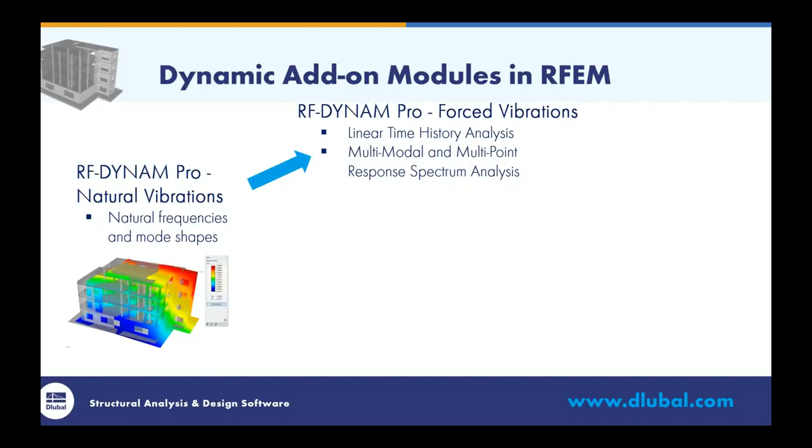Our second add-on module is RF-DYNAM Pro Forced Vibrations. So this allows us to run a linear time history analysis. Now we also have the ability in this module to run a multimodal and multi-point response spectrum analysis. This includes all of the standards such as the ASCE 7 and the NBC standard. The difference here though with this module in comparison to what we'll be using today, it's a little bit more limited. We can't export out the equivalent loads. It doesn't include things like accidental torsion. But it is possible for a little bit of a slimmed down response spectrum analysis.

The third add-on module is actually a module extension to forced vibrations. This is RF-DYNAM Pro Nonlinear Time History. So this just releases a couple of nonlinear solvers for the time history analysis. Now, as far as these two modules here, I previously did a couple of webinars available on our YouTube channel that really explores the depths of these modules. Today we won't be getting into them at all.

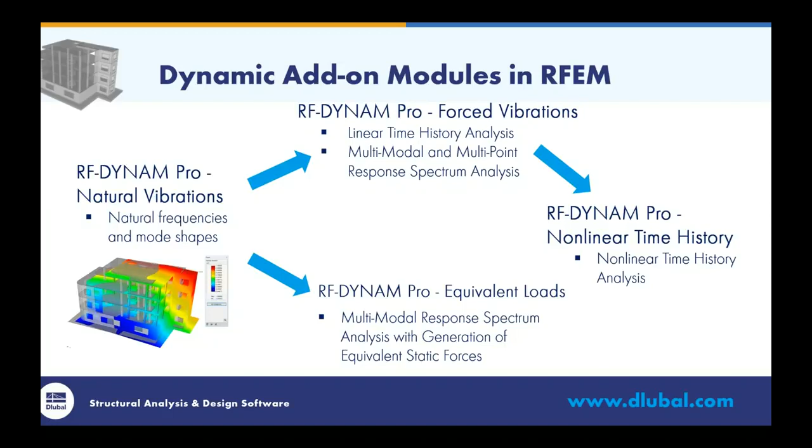Rather, we'll be focusing on RF-DYNAM Pro equivalent load. So this allows us to run a multimodal response spectrum analysis with the generation of equivalent static forces. And again, we'll be focusing on this per the ASCE 7 for today.

So we might be asking ourselves, well, why can't we just run an equivalent lateral force procedure, and how does this differ from a response spectrum analysis? The equivalent lateral force procedure is covered in section 12.8 of the standard, and this really is a simplification of our seismic considerations as a static analysis. So we're applying these point loads and these point moments to our diaphragms. And this is fine for symmetric structures with minimal torsion, no irregularities, no discontinuities. So all in all, it's really for short, symmetric, regular buildings.

And all too often we find ourselves outside of this range. And instead of running this simplified method, this is where we would turn to a modal response spectrum analysis. And this is covered in section 12.9 of the standard. So this takes into seismic considerations as a true dynamic analysis. We run our modal analysis to determine the mode shapes and modal mass participations for different frequencies of our structure.

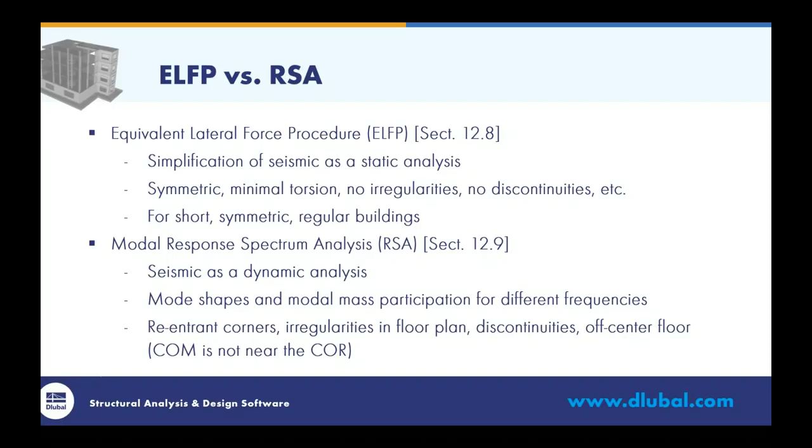This can be considered with buildings with reentrant corners, irregularities in floor plans, discontinuities, maybe off-center floors where our center of mass is not near the center of rigidity. Essentially this can be used for any type of structure, so perhaps you don't even have a building at all, but some type of specialty structure. With a response spectrum analysis, you can consider seismic with all different types of geometry.

With that said, we will jump into our first example today within RFEM. For the sake of time, I went ahead and modeled our concrete structure here in our main program, RFEM. We can see over on the left-hand side is our project navigator.

Because our model is already available to us here, we can view all of our input data on the left-hand side. For example, I can view all of my materials - in this particular case we're just using concrete 4000 PSI. All of my surfaces are available here for the different walls and slab elements. We also have some columns and beams modeled in, and we can view those available cross sections here.

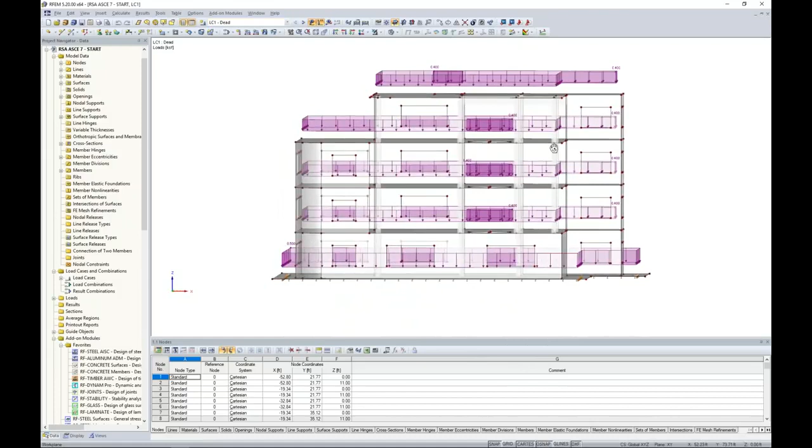RFEM also allows me to load the structure. Within my drop-down box at the top, I have a few different load cases. I have a dead load, which is just simple surface loads applied at each level, same concept for the live load - we can see those applied to the structure here. Finally, I have a third load case, which is snow load applied only to the roof.

If I was interested in running a full static analysis with these loads, I would do so within RFEM. But instead, we want to immediately move to a dynamic analysis, and this is where we want to utilize our add-on module.

On the left-hand side you can see in the project navigator our long list of add-on modules. This is why we have the concept of just pay for what you use. For example, if you don't particularly run a lot of dynamic analysis for your projects, you would never purchase the dynamic modules. So it just keeps the software catered for your individual design needs.

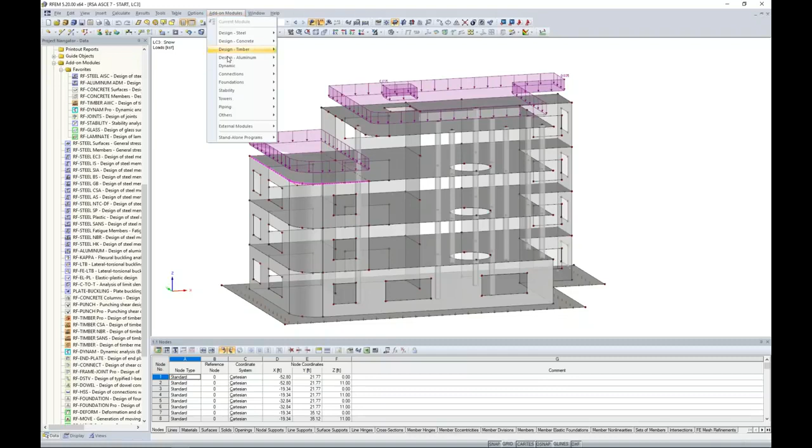We can access RF-DYNAM Pro either here or within our drop-down box at the top under add-on modules. You can see the dynamic option in RF-DYNAM Pro. An add-on module within RFEM is nothing more than a simple dialog box, and here we have all four of the dynamic modules that I mentioned within the PowerPoint.

You'll notice that natural vibrations is immediately checked because, as I mentioned, this is a prerequisite to the rest of our dynamic modules. We also can activate the mass combinations, which brings up a new tab at the top. All we need to do is simply work from left to right with these tabs.

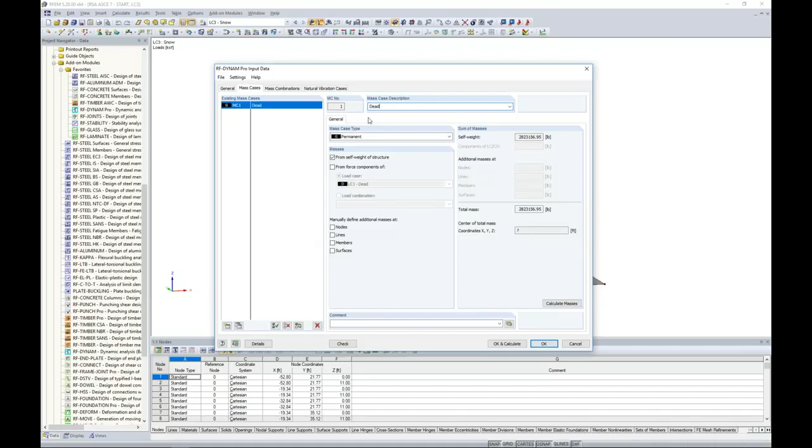So we move into the mass cases. Our first mass case is going to be dead. What we can do is directly import the loads from RFEM, so all those surface loads I had applied at every level, I can import in from the load case dead. Now I do want to uncheck self-weight of structure - I've already accounted for it in my load case back in RFEM, so if I leave this checked on, I'm accounting for it twice.

We can manually define additional masses, and I'll actually do this a little bit later on, but for right now we'll leave this empty. So we can make a copy of this mass case and rename this to live, and import the live load case from RFEM. And we make a third copy here, rename this one snow, and import the load case snow.

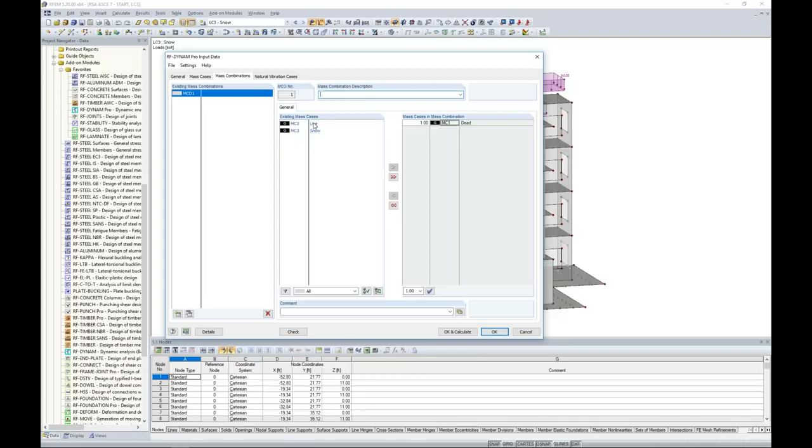Once we have completed our different mass cases here, moving on to mass combinations, we need to combine these together. Referring to the code, section 12.7.2, the standard tells us that we need to include 100% of the dead load. As far as the live load, if the live load is being used for storage, then we'd want to include 25% of the live load as well. Now for my particular case, let's say this is some type of office building, and we're really not using this live load for storage, so I can leave this mass case over here on the left to not use it.

For snow load, we want to include 20% of snow load when our magnitude is greater than 30 psf, and in our case we have 35 psf. So what we can do is simply change the factor out front to 0.2 to account for 20%. We can give this mass case a name if we'd like.

We'll call this one dead plus 0.2 snow. Finally, we have our natural vibration case tab. The lowest eigenvalues to calculate here is by default set to 4. That's a fairly low number, but for our first calculation today, let's just go ahead with 4.

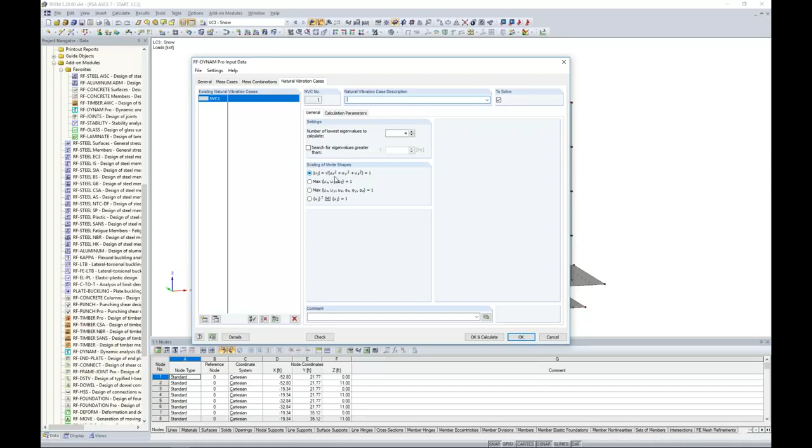The scaling of the mode shapes has a few different options. The default is to take the square root sum of the squares. There are other options, which I'd encourage you to access in the help manual in the lower left-hand corner for the dynamic modules, giving more theory on these scaling and mode shapes to determine if they'd be better for your design project.

The calculation parameters - we want to choose the mass combination we just created. As far as the acting masses, this is controlled by the type of mass matrix. By default, the diagonal matrix with only translational degrees of freedom is selected, so our masses only act in the global X, Y, and Z, which we can see back in RFEM.

The second option, diagonal matrix, will include both translational and torsional degrees of freedom, so now we're including masses about those axes. There are several different options here, but we'll just go with the first default.

Similar to what we just mentioned with the type of mass matrix, as well as the method for solving the eigenvalue problem, for the different calculation types you want to refer to the help manual for more insight on the theory behind each one.

For today, we'll utilize the Lanczos solver, which is an iterative method to determine the lowest eigenvalues and corresponding mode shapes of large models. This allows us quick convergence and runs a bit quicker than, say, the root of the characteristic polynomial, which determines all eigenvalues and corresponding mode shapes.

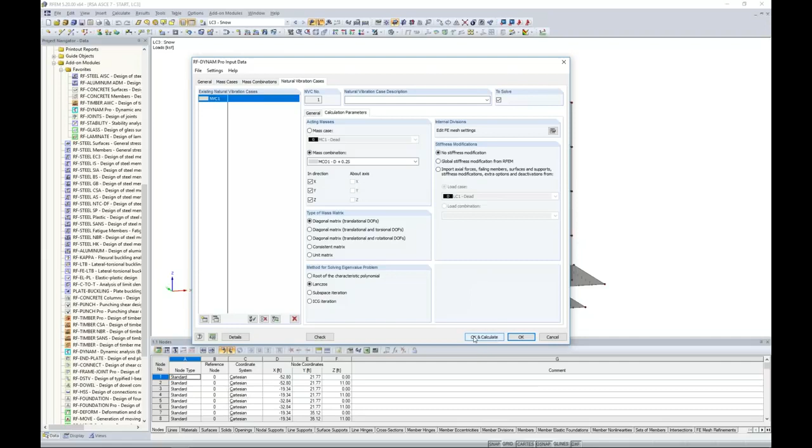As far as stiffness modifications, we're going to leave this as no stiffness modifications for now, but keep this in mind because we're going to visit this later when we discuss P-delta. So all I need to do is click OK and calculate.

The program's meshing it in the background in RFEM. We're running through our 4 different eigenvalues and we're immediately thrown back into RFEM. Now I'm technically still within this add-on module RF-DYNAM Pro. We can now see this within our drop-down box here.

I think the most relevant information for these results relates to Table 5, dynamic analysis, and we can jump to the effective modal mass factors. Here I can cycle through my 4 different mode shapes to view what they look like on my structure. But most importantly, we want to look at the last row in this table, because this gives us our mass participation.

You'll see in the X we have 81.6% mass participation, in the Y 76%, and in the Z only 2%. This is actually a problem because section 12.9.1.1 in the standard tells us we have to have a minimum of 90% mass participation of the actual mass in each orthogonal horizontal direction. So in my X and Y directions, I'm not meeting that 90%.

As far as the Z direction, today I'm really going to focus on excitations in only the lateral directions, but if vertical seismic is also something you're concerned with, then you probably want to make sure you have adequate mass participation in the vertical direction as well.

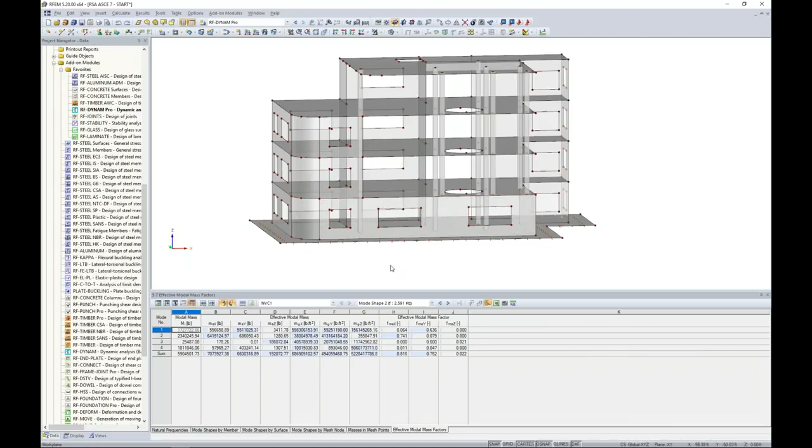So how exactly can we do this? Well, under the Views tab, and remember I'm back in RFEM here, I'm just going to activate my surfaces by material. So all that I've done here is I've just deactivated my columns and my beams, so only my surfaces are available with this graphic view.

So I can select all of my wall elements on the first level, and I can create a visibility by the selected objects. So after all these elements are highlighted, I can right click and I can choose this option, Center of Gravity and Info. What this is going to do is tell me the total weight of all of my elements selected here, which is 261,000 pounds.

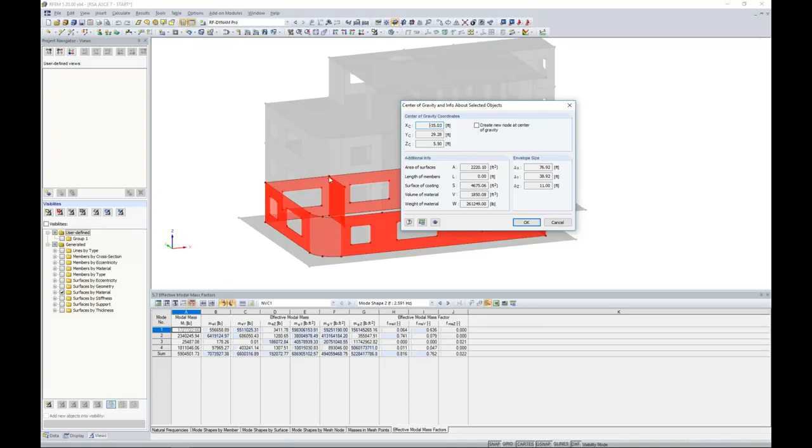So somehow we want to redistribute this total weight here at the top of our walls instead as a line mass. So what we can do is jump back into RF-DYNAM Pro, which we can access within our project navigator over on the left. What I'm going to do is go to the mass cases, and I'm going to create a copy of my dead load mass case.

And I'm going to rename it here to deactivate. And under the details option, this is where I have the ability to neglect masses, and I go into my special details. I have 4 different tabs at the top, including surfaces.

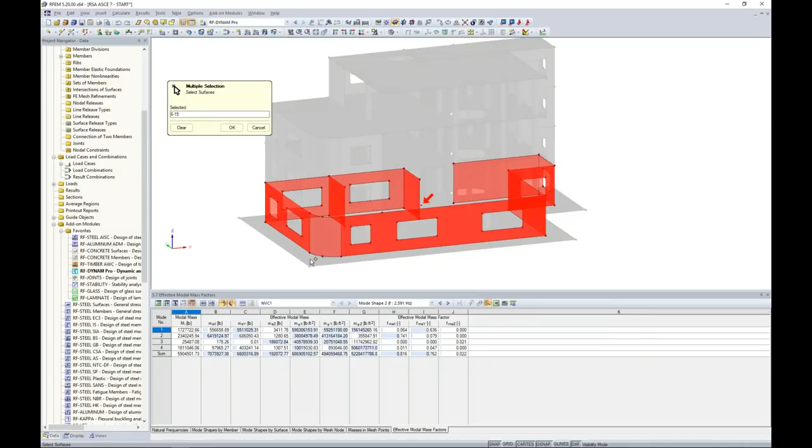So I can graphically select all of these wall elements that I have this visibility turned to back in RFEM, which includes 6 through 15 for my surfaces. Now I also, remember, want to select this slab at the bottom. So I could change around my viewports, but rather I can just simply type in surface number 1 in addition to this, and now you can see that bottom surface is highlighted as well.

And we want to neglect these masses in the X, Y, and Z directions. So I click OK, and I'm brought back into my Mass Cases tab here.

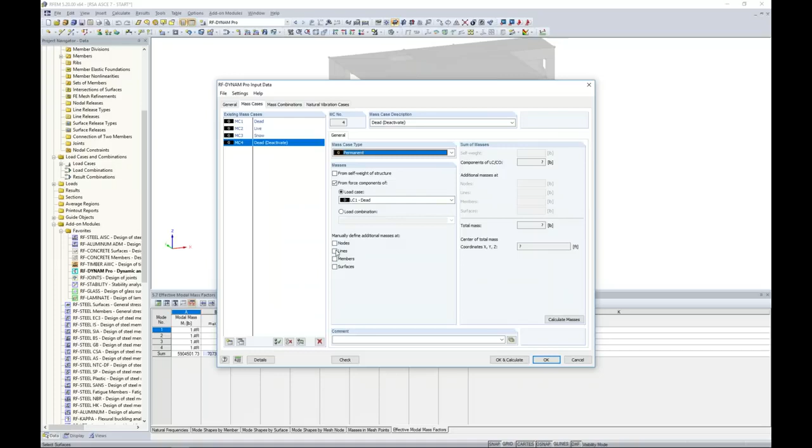This is where we want to manually define additional masses on lines. I have a new tab up at the top. So all I need to do here is I can graphically select every line at the top of these wall elements, and I will exclude these interior walls though. So I have every line element selected on the exterior.

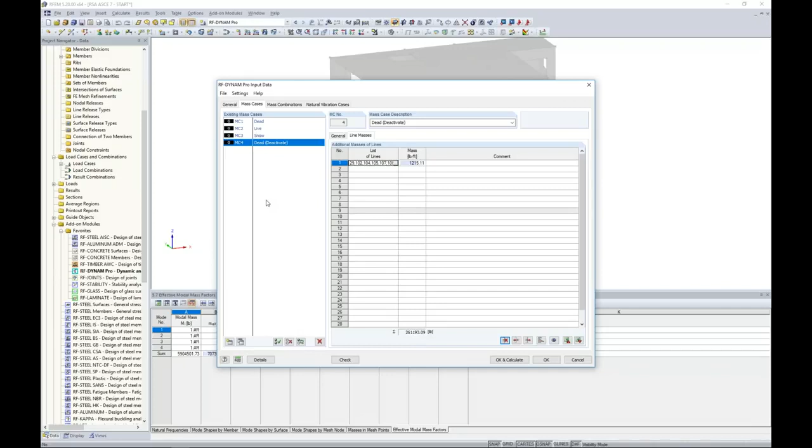Now I know the total length of the exterior of my building here around these walls is 215 feet. So I click OK, and what I can do is take that 261,000 pounds divided by the 215 feet to get a line mass of 1,215.11 pounds per foot. So now you can see the 261,000 pounds is represented in the sum here. So we're just redistributing that mass a little bit further away from the support to hopefully get more mass participation.

As far as the mass combinations, we want to create a copy of our previous mass combination, and we're going to rename this one. All we're going to do is swap out that dead load mass case. I'm going to instead bring over this dead load with the deactivate, 100% plus 20% of my snow.

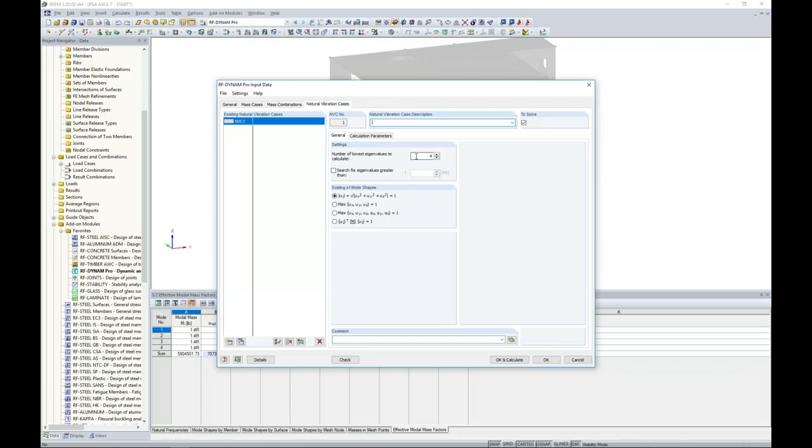So now for my natural vibration case, let's maybe solve as well for some additional eigenvalues. And by the way, as I mentioned, this is probably the first step that you want to take before you're redistributing masses. I just want to show both options in one step here with our example today. So we'll solve for 10 eigenvalues this time.

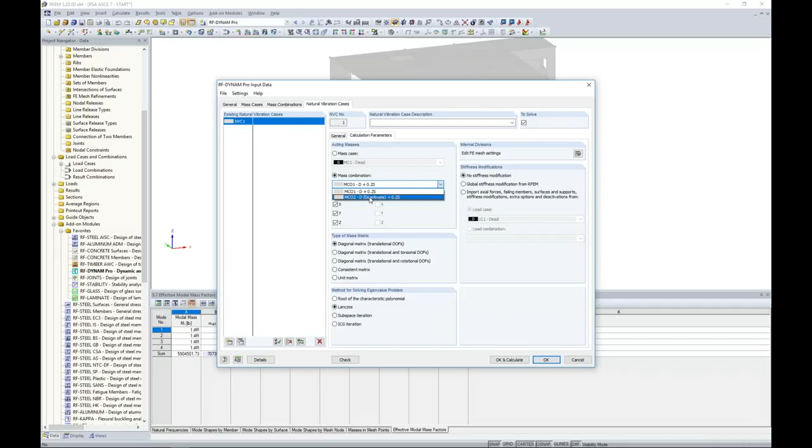Under the calculation parameters, we do need to choose our second mass combination here. So now we can click OK and calculate. So the program meshes the RFEM model in the background. It'll take just a split second longer because now we're going to calculate a few more mode shapes for a total of 10. So once the program's done, it brings us back into RFEM here.

We can cancel out our visibility mode, and now we have the 10 different mode shapes available to us here within our dropdown, so we can view exactly what those look like graphically. Now, of course, what's most interesting is the effective modal mass factor table here. And at the very bottom, I can now see that I have 91% in the X direction for the mass participation, 93% in the Y direction, and 41% in the Z.

So you can see what a significant difference those changes made with our total mass participation, and now we're meeting the 90% required by the standard.

We might be interested in viewing what our dominant modes are. We can take a look at mode shape number 1 here, and we see that this is our dominant mode in the Y direction, where most of the mass from the structure is contributing to this mode shape.

We can take a look at mode shape number 2. This would be our dominant mode in the X direction.

Now this is in comparison to mode shape 3, where we really have no mass participation, and this is called a local mode. We just have something happening up here at the top of the structure, so you can see mass participation in the X and the Y is 0. This mode shape really is not of much interest to us.

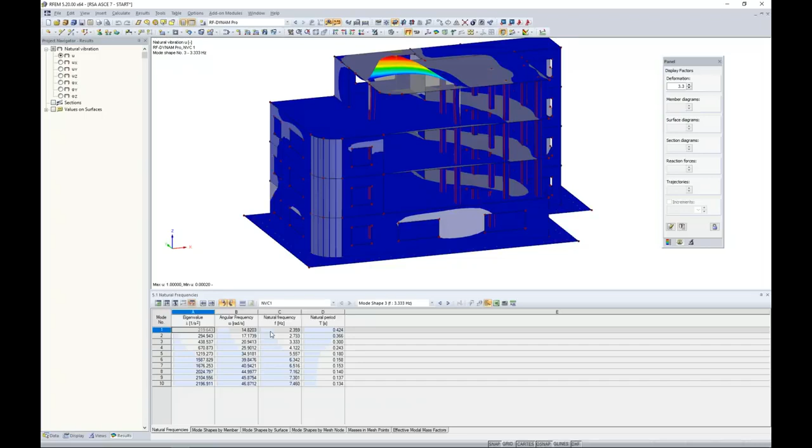Under the natural frequencies tab, this is where we can view the angular frequency, the natural frequency, and the natural period of our structure for these different modes.

So now that we have determined the natural behavior of our structure under the applied mass cases and mass combinations, we want to move into a response spectrum analysis.

Under the data tab, we're going to go back into RF-DYNAM Pro. This is where we're going to activate the response spectrum analysis with the generation of equivalent loads, using our second dynamic add-on module, RF-DYNAM Pro Equivalent Loads.

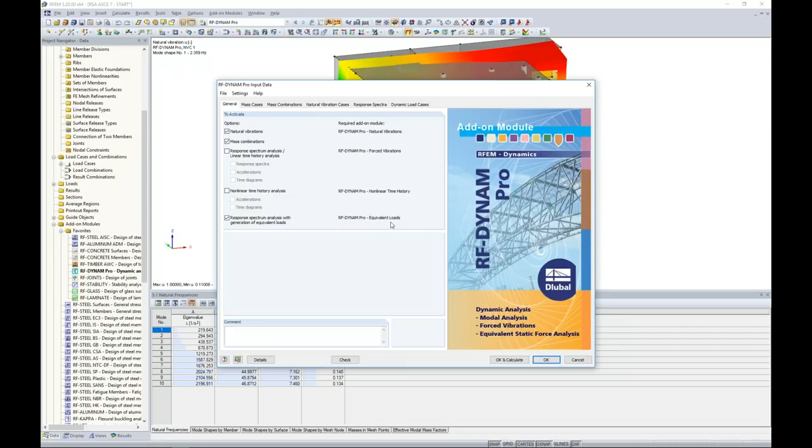Now, everything remains the same for my natural vibration case. I didn't lose any of this data, it's still available to me. All that I've done is added a couple tabs here for my response spectrum analysis.

What we want to do first is select our drop-down box here, and you can see ASCE 7-2016. We also have available NBC 2015, as well as many other international standards.

Moving forward with ASCE 7, over on the left we have some available data that we need to input into the program in order to correctly generate the response spectra for our project today. The first would be the site class, and with this particular concrete building, we've determined that we have site class C.

We also need to input the mapped spectral response acceleration for short periods, S-sub-S, as well as for a period of 1 second. We can refer back to ASCE 7 for this information, but instead I actually want to refer you guys to our website.

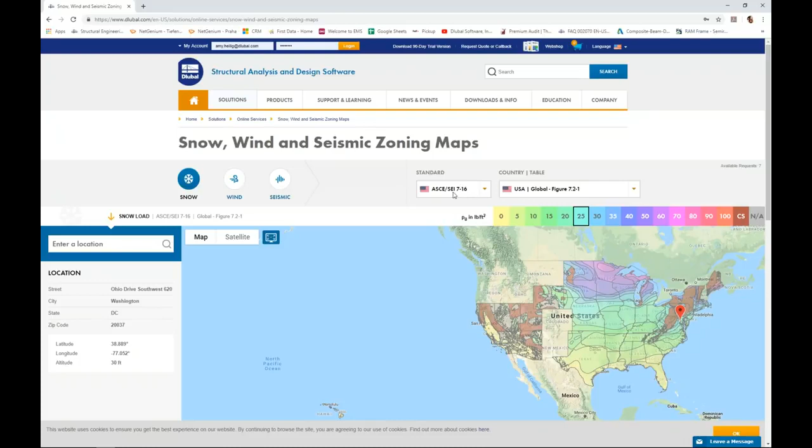So if you go to our website at dlubal.com, under Solutions, we have the option for snow, wind, and seismic zoning maps. What we've done is integrated Google Maps technology along with the ASCE 7 maps and tables for snow, wind, and seismic loads.

How this is extremely beneficial is that all we need to do is type in the location of our project. So for example, maybe this project today is located in Denver, Colorado. So we type in Denver, Colorado, and the map populates.

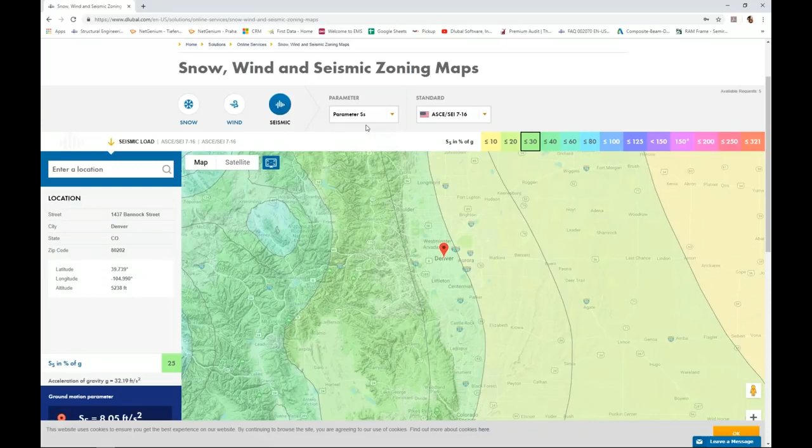We can hold down our control key to zoom in here, and we want to select seismic from our options up at the top. Now with the seismic and this parameter drop-down box, we can choose S-sub-S. This is the information directly from the ASCE 7 standard, and the S-sub-S is 25% of G.

Same thing with S-sub-1 that we'll eventually need. Once this is populated, when we choose it from our drop-down box, we get 6% of G shown over here on the left-hand side.

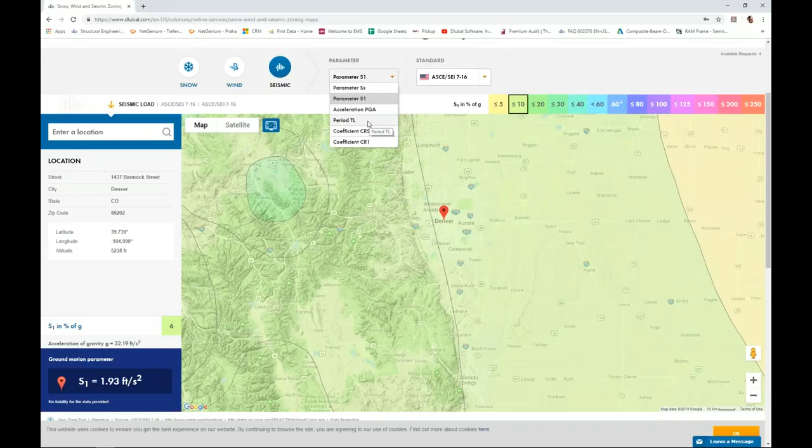A few more parameters are available. The other important one will be the long period, which if we select this one, we can see that the long period is 4 seconds.

So it's extremely beneficial if we just don't want to manually flip through those maps within the code. The ability to go on our website and check this out for yourself is available.

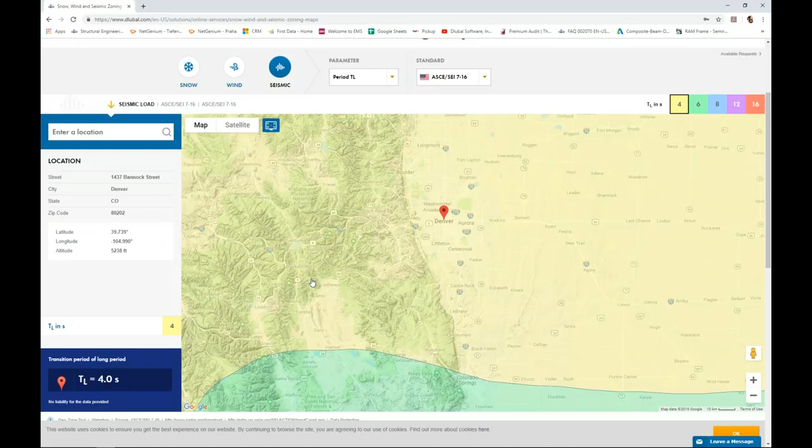So going back to the model here, what we can do is type in the S-sub-S parameter that we just determined from the GeoZone tool. The S-sub-1 will be 6% of G.

All the rest of these parameters are calculated automatically within the program, but we do need to put in the long period transition period of 4 seconds, which is already the default setting.

And for today, I'm only concerned in X and Y directions. If I was concerned with vertical seismic, then of course we'd want to activate Z as well.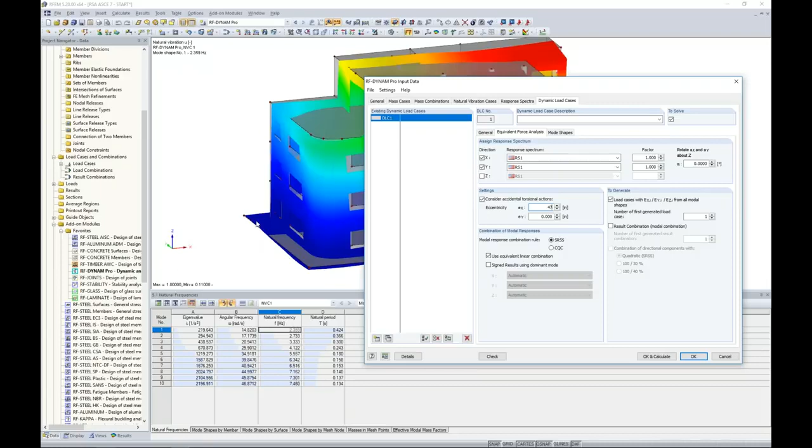Now, in a similar manner, we have eccentricity in the Y. When we compare that in the Y direction here, it's the short direction of my structure. So this would be 5%, is 24 inches.

Now the program is smart enough to know that it should multiply the forces in the X direction times eccentricity in the Y. It will multiply the forces in the Y times eccentricity in the X to create that torsional moment.

Combination of modal responses. We have two different options here, the SRSS and the CQC rule. So for this, I'm going to go back to the PowerPoint here.

So here we have a whole set of equations. Now, each line item here represents an excitation direction. So we have excitation in the X direction, excitation in the Y, and excitation in the Z. And we're going to generate these equivalent forces, which are available to us on the left-hand side. And these are in X, Y, and Z directions as well. Now, over on the right-hand side, we have some additional variables, such as the participation factor. We have our mode shapes available to us here. S sub A would be the acceleration from the ASCE 7 response spectra as a function of the building period. And then we have over on the right our masses.

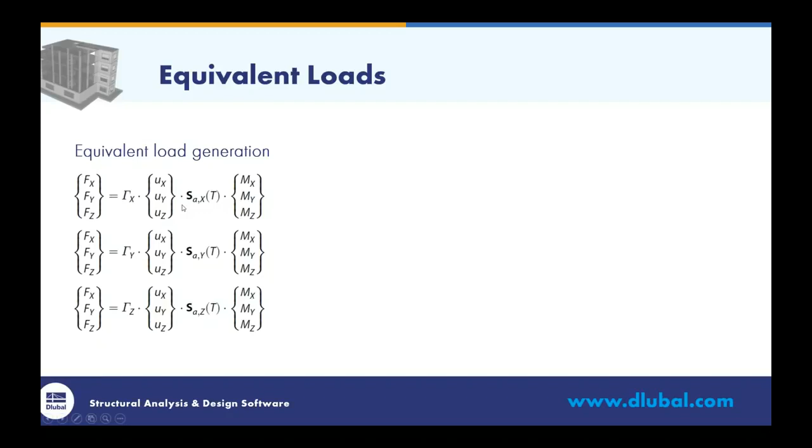So we have all of these different mode shapes, and in our project today, we have 10 different mode shapes. So the question is, well, how do we combine all these different mode shapes for each excitation direction? And this is where we have one of two options.

The first is the square root sum of the squares. Fairly simple formula here, you can see we're just going to square each modal response, add them together, and take the square root.

The second option that we have is the complete quadratic combination, or the CQC rule. You'll notice that the equation for this is a little bit more complicated, which does include the correlation coefficient epsilon. Now, a huge difference here is that epsilon contains a damping factor. So we see that within this equation shown here.

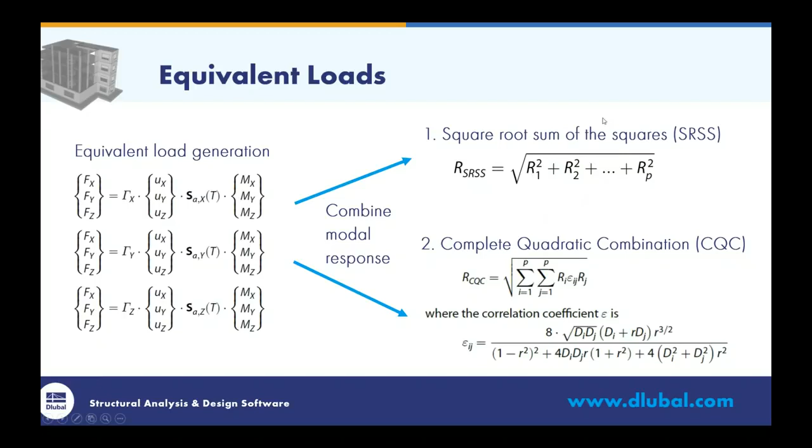So with the CQC rule, we can consider damping as opposed to the SRSS, which we cannot.

So going back to RFEM here, we want to consider the CQC combination. Now we have a damping tab available to us at the top. We can assign the signed results using the dominant mode.

So within the PowerPoint, you just saw that in either scenario, I'm taking the square root of the result. So inevitably, we're going to lose that signage. Well, the program has the ability then to take that signage back in from the dominant modes, and we can see within the X and Y directions, we can leave this to let the program automatically determine what the dominant mode is, or we can manually assign it from the 10 mode shapes that we've solved for. We do want to generate the load cases.

So the program is going to export out all of these equivalent loads for each mode shape as a separate load case. I think it'll be interesting to see graphically how this looks on our structure.

Now, furthermore, we want to create a result combination with our modal combination, per the CQC rule. So essentially, we're going to see two result combinations, one in the X and one in the Y, because we've combined all the modal responses into a single result combination in each orthogonal direction.

Now, furthermore, we have the combination of directional components. For this, we refer to section 12.5 of the standard, which gives guidance on the direction of loading. We have forces in the X and forces in the Y. So how do we combine these? Well, for seismic design category B, the code tells us that essentially we can consider both separately and just look at the results of our structure for each one individually.

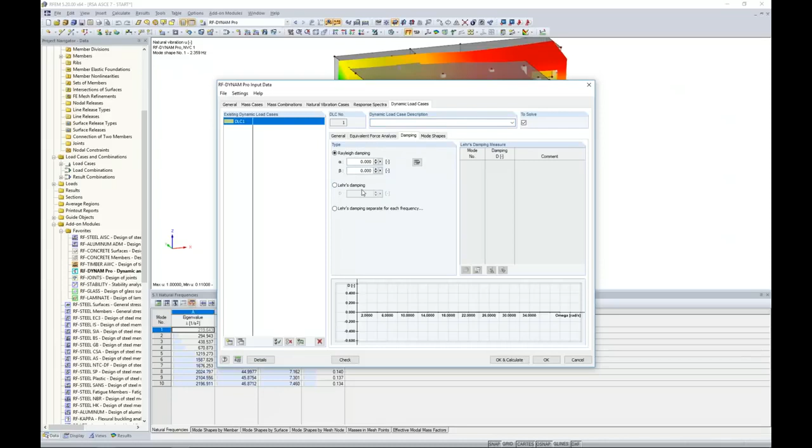The damping - we want to consider damping here before we export out those equivalent loads. So within the damping tab, because we are combining according to the CQC rule, we have either Rayleigh damping or Lehr's damping. Just to let you know, for the equivalent loads, it will convert Rayleigh damping to Lehr's damping in the background. So if you prefer to put in an alpha and beta coefficient for damping, just know that essentially it's converted to Lehr's damping anyway.

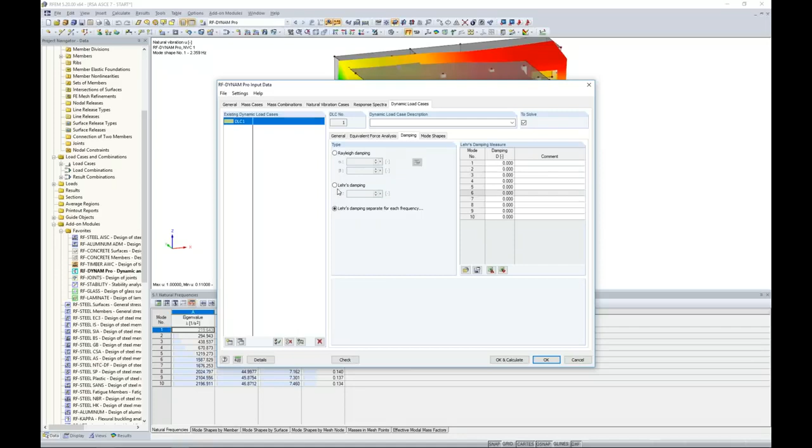Us as engineers, we're probably a little more familiar with damping. For Lehr's, for example, a concrete structure might be something like 5% damping. We also have the ability to set Lehr's damping separately for each frequency or mode shape of our structure, which you can see with this option over here on the right. Today we're just sticking with 5%, and we do need to visit here our last tab before running those equivalent loads calculation.

So you'll notice we did already solve for the natural vibration case, which we saw with the 90% rule that we needed to adhere by. And here are my 10 different mode shapes. We also give them mass participation directly within this table as well.

What the program gives you the ability to do is deselect modes that really aren't of much interest to us. For example, I can deselect modes that are less than 3% mass participation. How this helps me is that I now have 3 modes here that are unselected, yet I'm still meeting that 90% mass participation. That's a huge advantage - as you can imagine, with 100 different mode shapes, a lot of them may be irrelevant, so this will really slim down our calculation. The program can automatically deselect those, but we still want to make sure we meet the 90%.

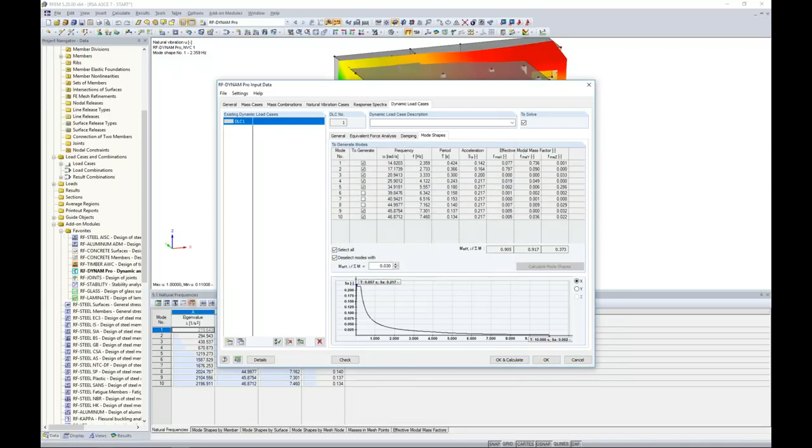Okay, so now we are finally ready to run our calculation here with the equivalent load. As I mentioned, the program already ran the natural vibration case, so we're just going to move on to the dynamic load case and apply the response spectra per the ASCE 7.

So again, we're brought back into RFEM, and as we saw before, here is our natural vibration case that we've solved for previously, but we now also have a dynamic load case. Within this dynamic load case, if we look at these tables, we have all of our different mode shapes that we've solved for. Now remember, I slimmed this down to 7 different mode shapes now. We have every single FE mesh point available within this table from our structure, and we have a force in the X, the Y, and Z direction, as well as a moment applied for accidental torsion.

So that's what's happening here for the dynamic load case for each mode shape. Now, it might be easier to understand if we take a look at our load cases and combinations. Remember that I previously had dead load, live load, snow load as my load cases. But what the program has done now is export all of those equivalent loads for each mode shape as load cases back in RFEM.

You'll see here that for load case number 4, I now have my mode shape 1 for my excitation in the X direction with positive torsion. My next load case, exact same thing, mode shape 1 in the X direction for negative torsion. Then the third one: excitation in the Y direction for positive and negative torsion. We go through all of these to essentially determine the equivalent loads for each mode shape.

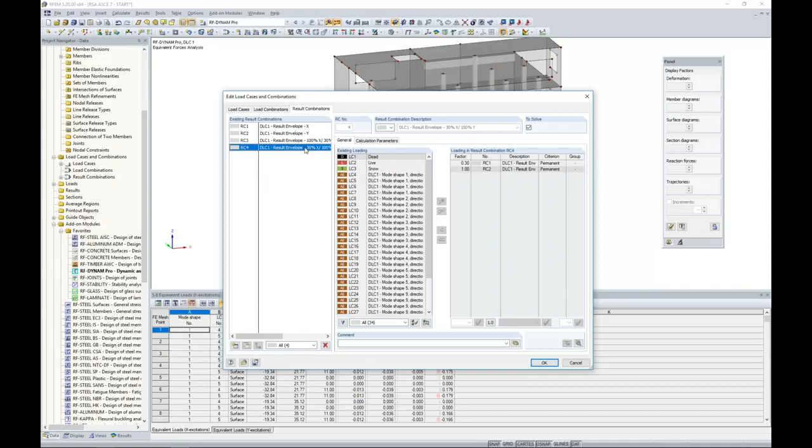Now, in the Y direction, exact same concept here. We're going to take all of our mode shapes with excitation in the Y direction, and combine them according to the CQC so we just get a single result combination for excitation in the Y direction, considering all relevant modes. Then also, as I mentioned, we have our 100/30 rule. So we have 100% of this X load acting and 30% of the Y, and our second result combination is 30% in the X and 100% in the Y.

Jumping back into RFEM, if I take a look at one of these individual load cases, I can display my load. This is the setting I changed under the Details tab previously, just so we can view this. It's a little overwhelming because this is all of these forces being applied to every single FE mesh point. You'll notice that my walls and my slab are excluded here because I excluded them entirely from my mass case, so we're not seeing any loads acting on these surfaces down at the bottom.

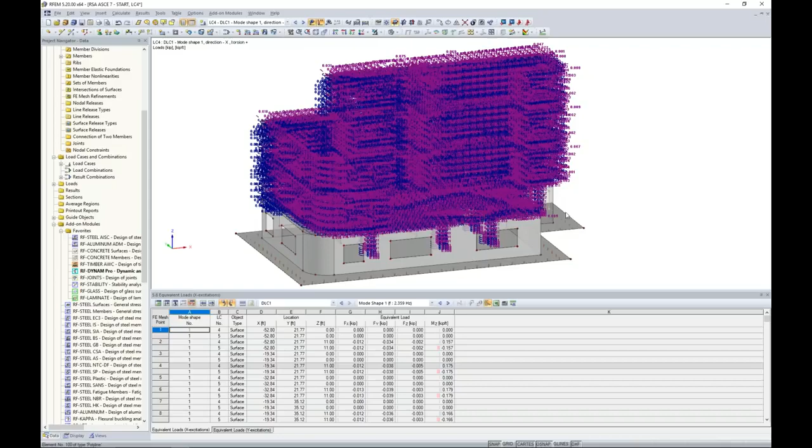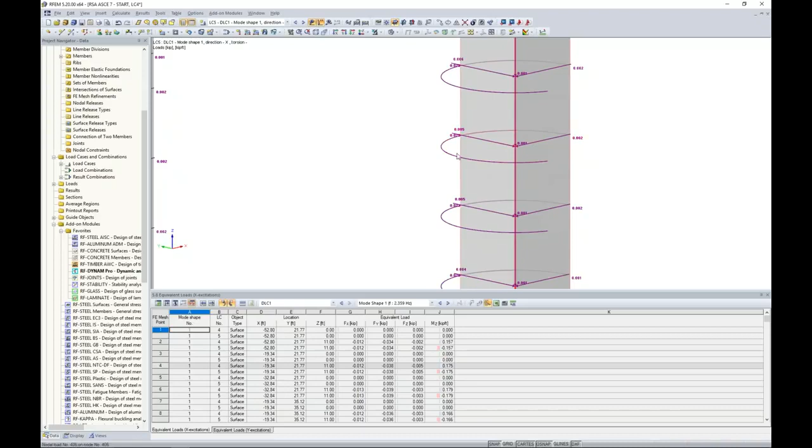If I turn this model around and zoom in on one of the columns, it'll make a little more sense. We have a single FE mesh node here, and this is where we are applying our loads in the X, Y, and Z direction. We also have a positive moment acting here for accidental torsion. If I take a look at the next load case, we just reverse the moment. So that's what's going on for all of these individual load cases.

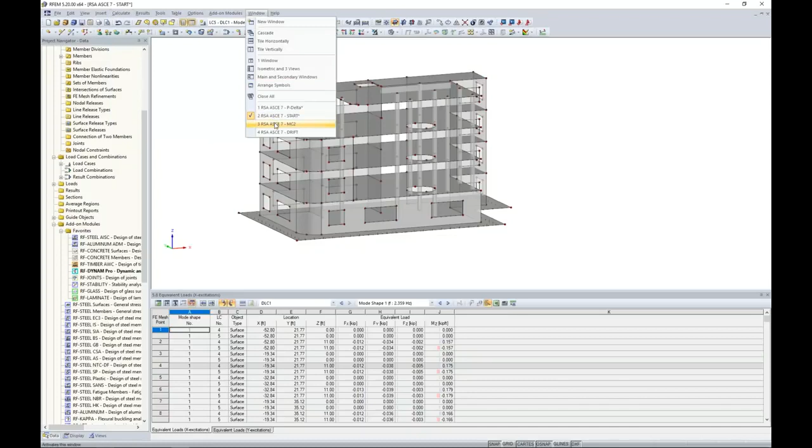Now we'd like to go ahead and solve the model here. So all that we've done with that dynamic module is export these loads back into RFEM so we can now run a so-called static analysis. How we can do this is go to Calculate, Calculate All. For the sake of time, I have already solved this for all my different load cases and result combinations, and we're now presented with our results in RFEM.

So maybe what I jump to here is my result combination with excitation in the X direction, and we can view the global deformations here. Most of our deformations are in the X direction, which makes sense because this is where excitation is taking place. But in addition to the global deformations, under my results tab in the project navigator, I can view my internal forces for my members. For example, if I want to take a look at my columns, we can focus on these exterior columns.

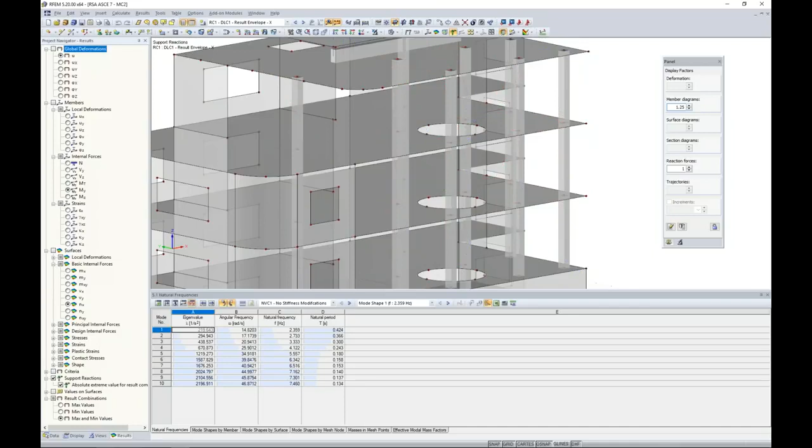We can view the results diagrams for my axial loads. We can take a look at shear forces in both the strong and weak axis direction. We can view bending moments for both the beams and the columns, and this is based on just those seismic forces. In a similar manner, what we can do is activate our surface results here in the form of contours.

With our surfaces, if I highlight our slab down here at the bottom and create a visibility by selected objects, we can view our bending moment along the local x-axis, bending moment along the local y, shear forces, normal forces, and so on. This is all available to us regardless of which result combination we're looking at.

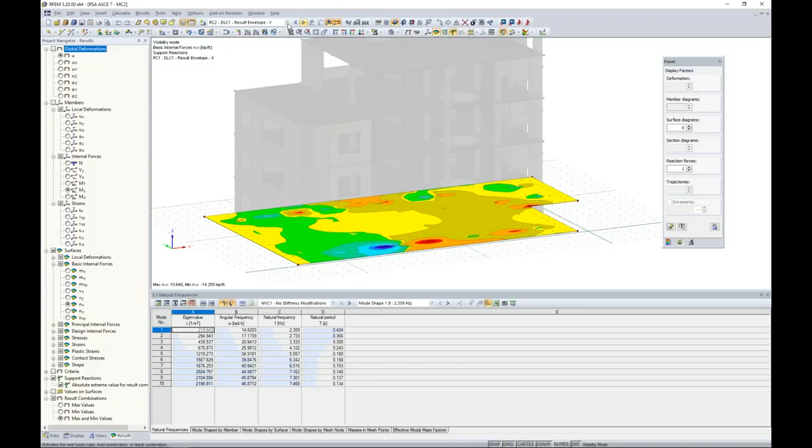So here's my excitations in the Y direction now, because I changed my result combination up here. Of course, we can view the 100/30 rule as well.

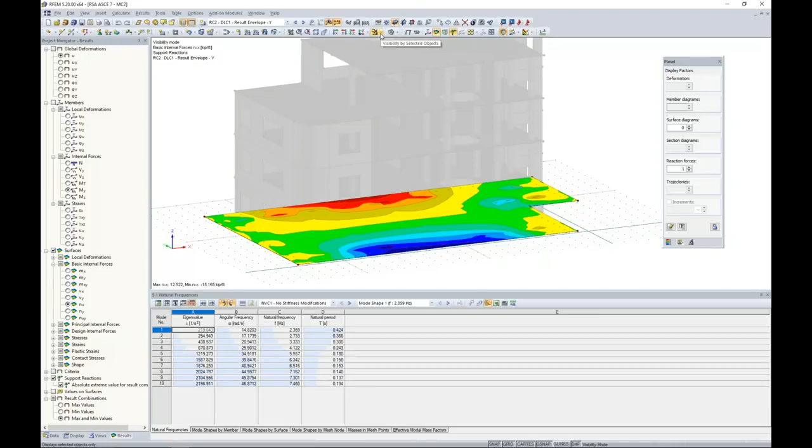So after we solve for all of these different seismic forces and how they're affecting our structure, what we want to discuss now is called the base shear. Let me cancel out this visibility, turn off the surfaces here, and jump to one of these load cases of one of our dominant modes.

With the dominant modes, I can go to my dynamic tables here and choose my dynamic load case. At the bottom of these tables, if I scroll all the way down, I get a summation, and I want to jump to mode shape number 1. This will show us the base shear for the X and Y directions. Remember, though, that this is the base shear for only this particular mode shape.

Now, you do need to take this number and divide it by 2. The reason is because we are accounting for both positive and negative accidental torsion here. So your true base shear at the bottom of the structure in this table is this number divided by 2.

So this is extremely helpful for these individual mode shapes that we can just access this table. But the question is that we're probably more so interested in our base shear for one of our result combinations instead, after combining all of these mode shapes with the CQC rule. We want to look at result combination 1 here with excitation in the X.

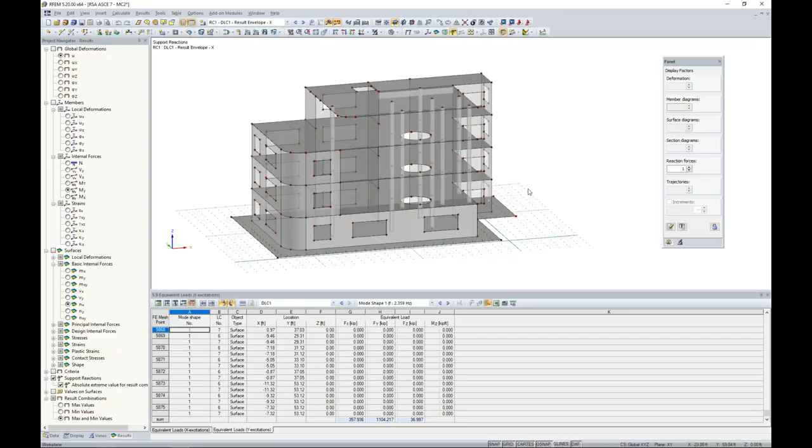Well, what I'm going to do is hold down my control key here to select a single column stack within my building. If I continue to hold down my control key, I can copy and paste this column stack here, and it asks me to clear my results. That's fine. So we've just made a single copy of this column over here on the right.

What I'm going to do is highlight all of these columns, right click, and under member, edit. We're going to change the member type to what's called a result beam. Now, a result beam does not add any stiffness or any modifications to our structure.

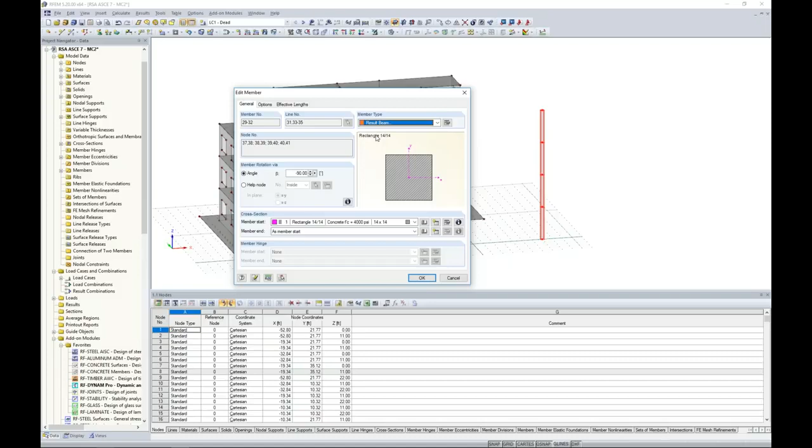All that we're doing here is summing up all of the results from the rest of our structure and presenting it to you in the format of a member element instead. You'll notice I won't even support this result beam here because we don't need to, since it's not part of the analysis. We do assign some cross section, but it doesn't matter—we'll just use one of the ones we already have defined here.

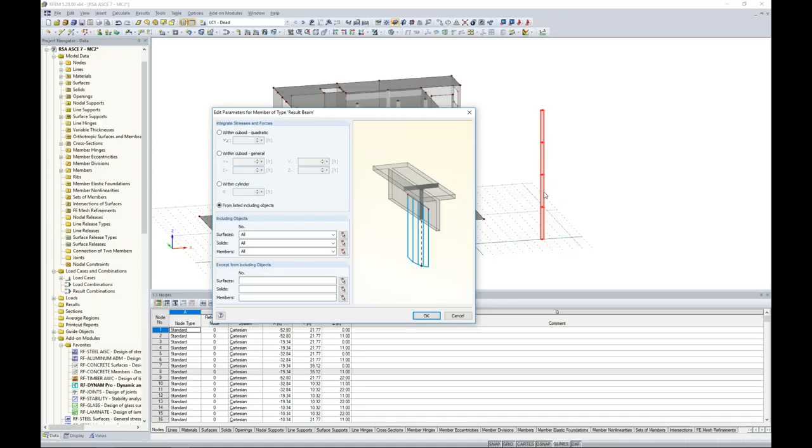We go into the edit member type details, and this is where we can choose from the listed objects. Now the default is set to all, and this is fine for today because I want to sum up all my surfaces. We don't have any solids, but it doesn't matter. We can leave this as all, and all my members, and I want to present all of these results in a beam type format or a column type format over here with my result beam. So I click OK, I click OK.

But what I need to do is first go back to RF-DYNAM Pro and rerun this calculation, because creating that result beam cleared my results. We need to run back through initially the natural vibration case, which we can see denoted within this dialog box. Then the program moves on to the dynamic load case, exporting out all of those different equivalent loads from each relevant mode shape.

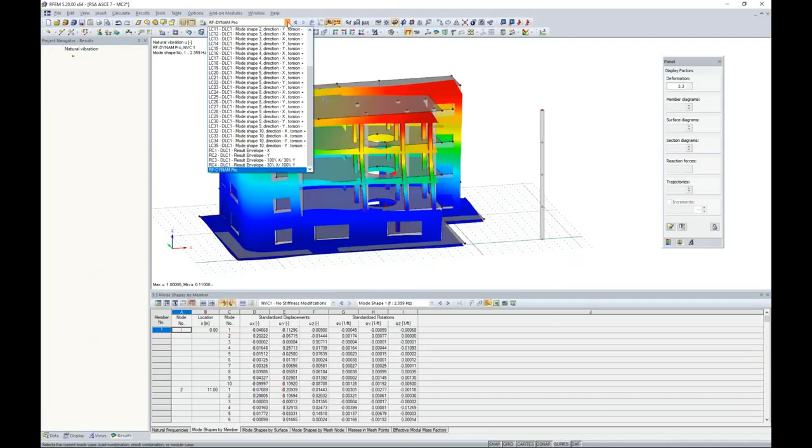Once the program finishes doing that—remember that I haven't actually solved for these loads within RFEM yet—all my load cases are available to me as well as my result combination. So we're just going to run this single result combination here for excitation in the X direction. The program is submeshing it in the background.

Now remember, this column has absolutely nothing to do with the analysis, so it's not contributing any stiffness. Rather, we're just taking all of those mode shapes which are applied in the X direction and combining them per the CQC rule for this result combination. So eventually, the program will present to us our results here.

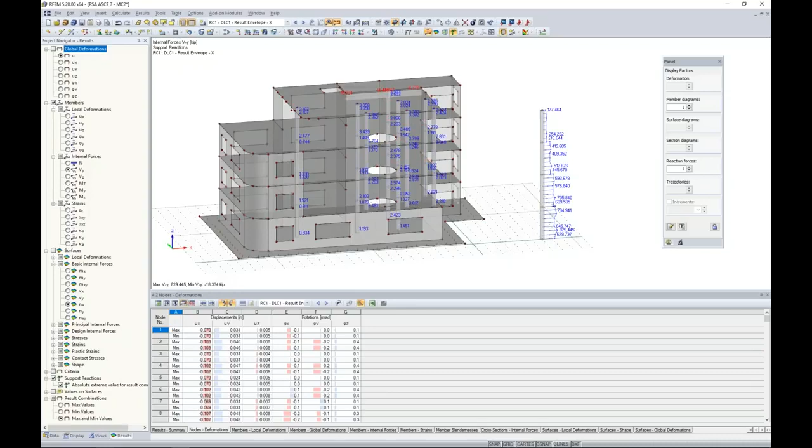Now, after the results are available, what I'd like to do is activate my Members tab. What I'm interested in is the shear force for my result beams in the local Y direction. So for my excitations in the global X direction, I'm viewing the shear forces on my result beam, which is summing up what's happening with this entire structure, from my foundation all the way up to the top.

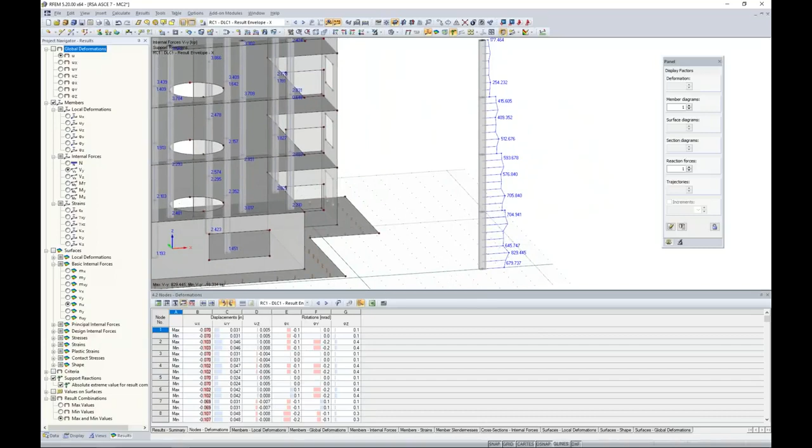So when we zoom in here, we can take a look at these particular shear forces, and down at the bottom our shear force would be 679, our base shear, minus the 704.9. This is a little bit counterintuitive, but remember we deactivated all these masses and applied line masses instead, so it makes sense that our story shear at the first level is actually higher than our base shear. So our story shear at the first level would be the 704.94 minus the 593.

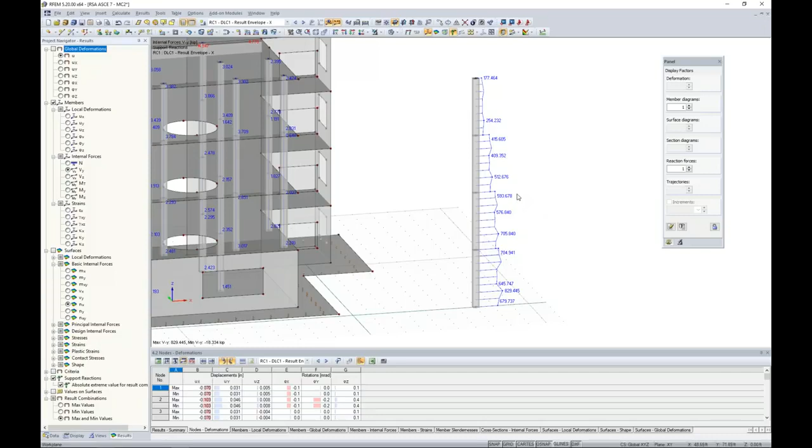We do so at the second floor at the 593 minus the 415, and so on. That's the individual story shear, clear up to the top, where 177.46 is the story shear for our top level.

So with this information, I want to go back to the PowerPoint to discuss base shear considerations. Section 12.9.4.1 of the standard addresses scaling of our forces, and the code tells us that we need to determine the base shear in two orthogonal horizontal directions, and with our case today, that's X and Y.

From here, the code has the variable V sub t. V sub t is what is the RFEM's modal base shear from the combined response, again according to the CQC rule, from the result beam. So I just showed you how to determine that base shear from the result beam.

Now we compare that to the shear within the standard, which is calculated from the equivalent lateral force procedure from section 12.8. So you can manually calculate this value.

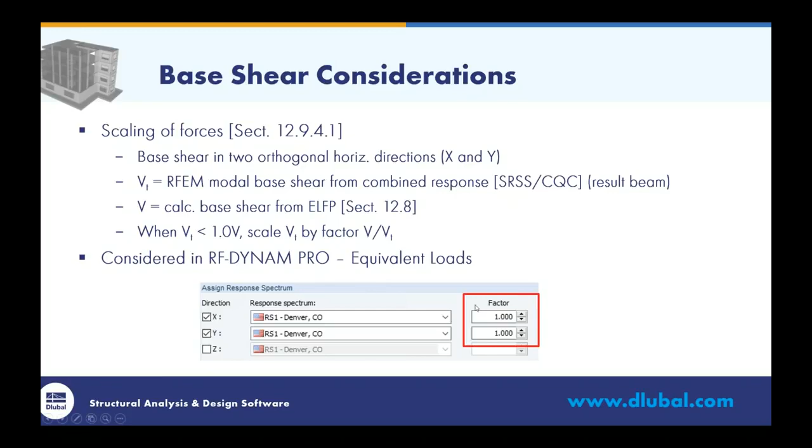Now, when our modal base shear from RFEM is less than 100% of our equivalent lateral force procedure shear, then we need to scale our base shear by a factor, and that factor is simply V over V sub t. So if you are not meeting this criteria, you can go ahead and scale your shear forces within RFEM in RF-DYNAM Pro, and we can do so with these factor settings here.

So going back into RF-DYNAM Pro under my data tab, I can access that here again. I just want to show you guys under dynamic load case equivalent force analysis, this is where we want to put in a factor of whatever that comes out to be. So that is the ability here to set that if we aren't meeting the modal base shear.

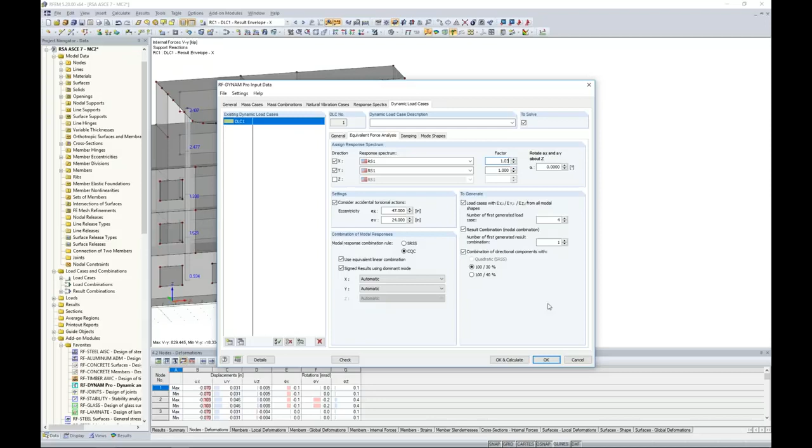The other consideration that we want to discuss is drift. With story drift determination, this comes from section 12.8.6. The code tells us that we need to determine different deflection location points, set at the center of mass for each different story.

Now, if the center of mass does not coincide at the same location for every level, then we have the ability to project the center of mass at the top of the story down onto the center of mass at the bottom of the story, so that we have a straight line passing through our entire structure.

Now for seismic design category C through F, or if we have torsional irregularity, the standard tells us that we must also consider edges. This is fairly easy to determine within RFEM, which I'll show you guys in just a minute.

But just keep in mind that deflection is not purely the information that we pull from the program, but rather it comes from equation 12.8-15, where we multiply this deflection times the deflection amplification factor C sub D, and divide by the importance factor I sub E. So this is the true deflection according to the ASCE 7.

Then the calculated drift for each floor is simply this deflection from the equation above from the top floor minus the deflection from the bottom floor.

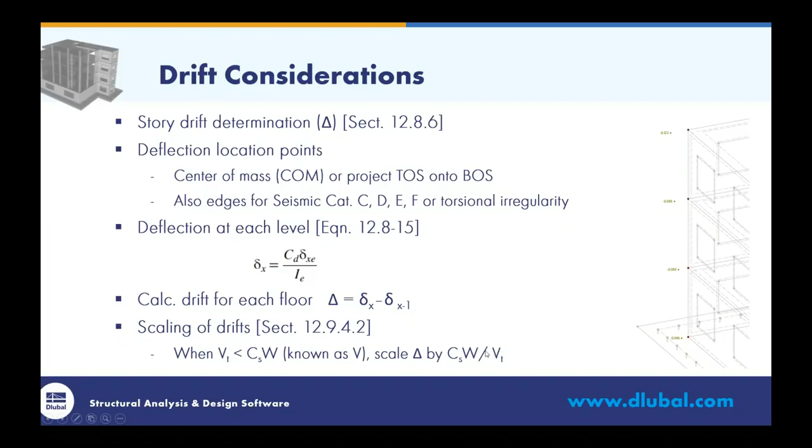This is known as V from the equivalent lateral force procedure, the exact same situation we just saw with base shear. So we would want to scale our drifts by this V over V sub T ratio. Back in RFEM, what we can do with the center of mass is, for a particular story, select the slab and all elements framing into it.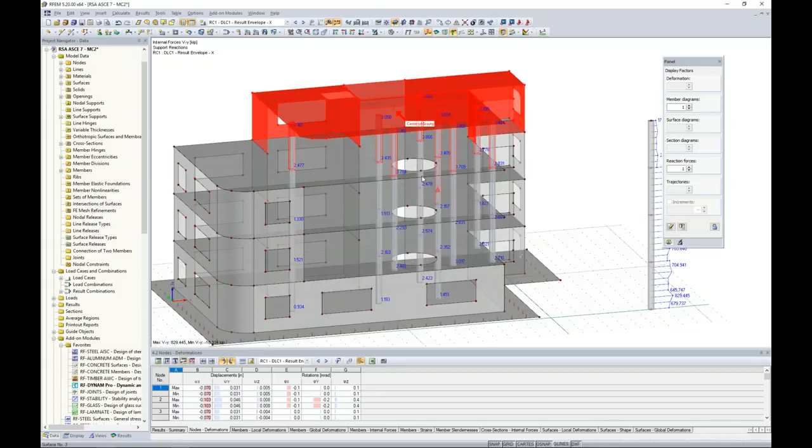We can right click, and under center of gravity and info, we have the ability to create a new node at the center of gravity. The program will place a node there. You would then double click on that node and move it up to the elevation of our top story, and then take that node and project it down through all of our different stories.

For the sake of time, I went ahead and did that with an already saved model. You'll notice I created my center of mass node up at the top story, and projected it down through each level.

What I also did is I selected all my nodes at the edge points here, and under the Views tab, I created a user-defined view with only these nodes selected that I'm interested in for drift.

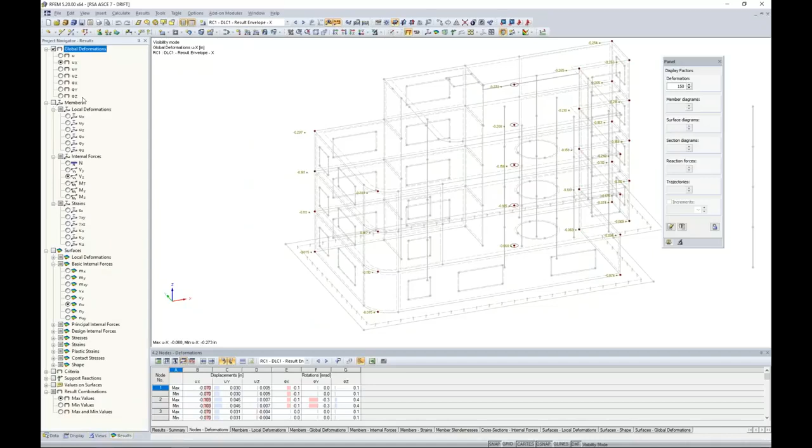Once we run our calculation, we can view the deflection for our result combination in the X direction. Under results, we can view deflection in the X direction. We can zoom in to an edge point, and the deflection for our top story is given as 0.207, while the story below it is 0.161. But don't forget we need to multiply by the C sub D factor and divide by the importance factor, as the code tells us.

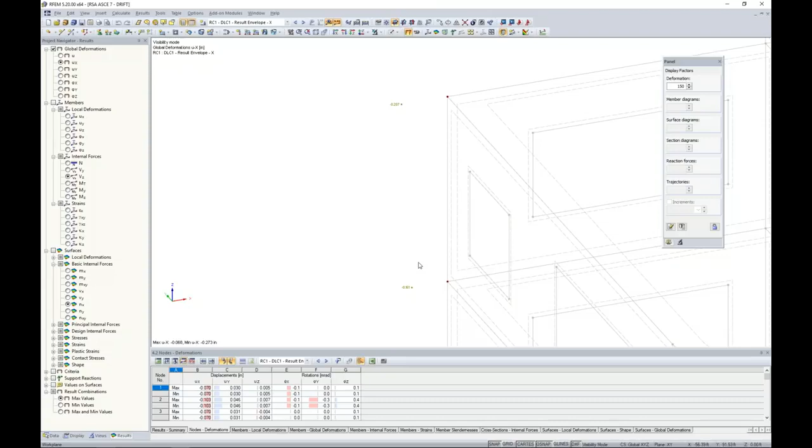An easy way to pull all this information for only the relevant nodes is to create this user-defined view. I can highlight all of my elements here so you can see they're selected in red. Now in my tables, I can jump to table 4.2, which shows the deformations of my nodes.

We have this nice tool that says show selected objects only. So within this table, it will only show me the nodes I've graphically selected, rather than every single node within the entire building.

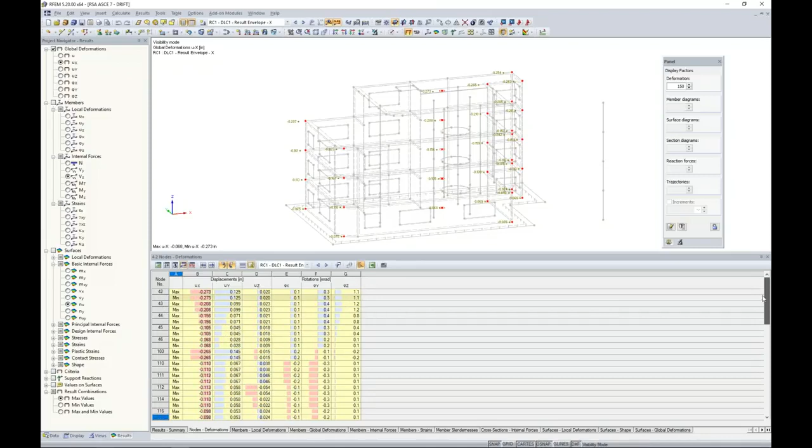I can export this deflection information directly to Microsoft Excel, and run the deflection equation per ASCE 7 if I need to scale drifts and so on. That's how we can efficiently calculate drift for any type of structure within RFEM.

The final topic to discuss here is p-delta considerations. P-delta effects come from section 12.8.7, referring to this equation on the right with theta. P-delta effects can be completely neglected when theta is less than 0.1.

However, if theta is greater than 0.1 but less than theta max, which is also given within the standard here on the right, then we need to multiply our displacements and our forces by 1 over 1 minus theta. This is how we can easily consider p-delta effects if we're not meeting this criteria.

It's just a simple, conservative way to export displacements and forces and multiply by this factor. Keep in mind, if theta is greater than theta max, the code tells us we need to completely redesign the structure because it's not safe.

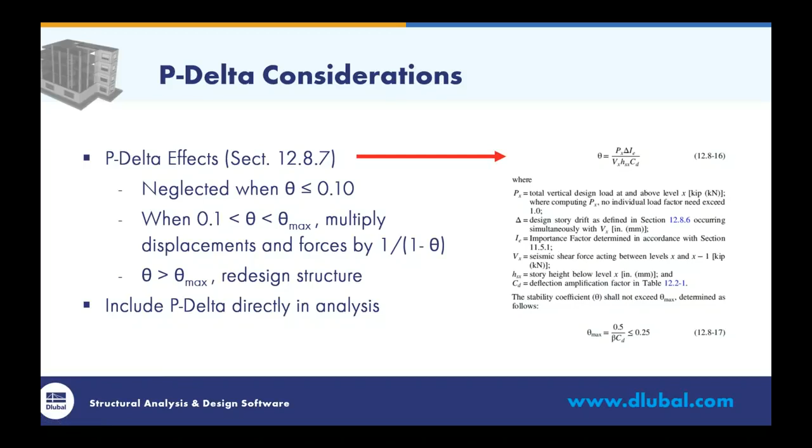This might be fine for a simple application, but we may be more interested in how we can include p-delta directly within the analysis. When we take a look at p-delta, we actually cannot iterate p-delta calculations for second order theory within dynamic analysis. It's just not applicable.

So what we do is linearize this with what's called the geometric stiffness matrix, based on axial loads only. There are two assumptions with this type of linearization: one is that vertical loads do not change due to horizontal effects, and the second is that deformations are small compared to the overall dimensions of our structure.

As far as the geometric stiffness matrix, denoted by K sub G, this tells us that tensile axial forces increase the bending stiffness of a member, while a compressive axial force will reduce the bending stiffness. A very simple application of how this can be applied is if we think of a cable: when a cable is in tension, it certainly has an increase in bending stiffness.

But when we apply a compression force to a cable element, it's really completely useless, so we have reduced its bending stiffness. This K sub G reflects this stress stiffening effect.

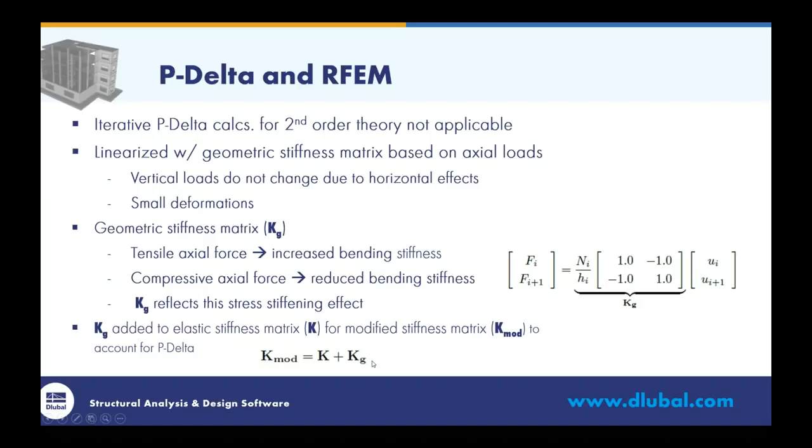So how do we do this within RFEM? I'm going to go back to my load cases and combinations here, and we have yet to visit this load combinations tab. Referring back to the ASCE 7, section 2.3.6, there are some load combinations we want to put together to account for both gravity loads and seismic. In particular, my worst case scenario is equation 6. If we create a new load combination here, it includes 1.2 dead plus live plus 0.2 snow, and eventually we'll add in our earthquake as well.

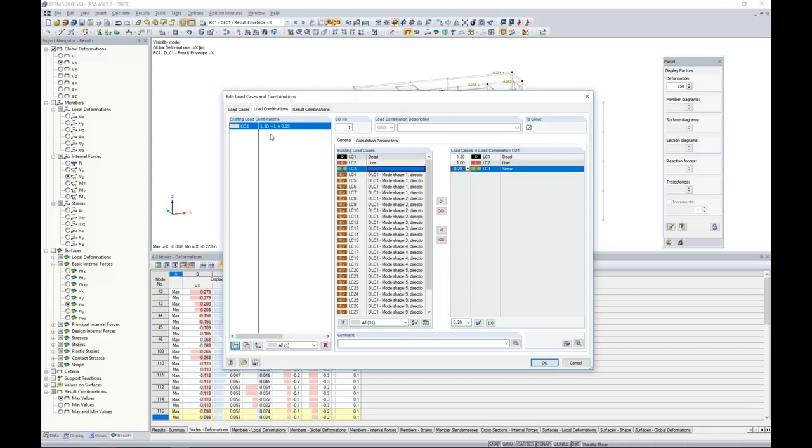But for these gravity loads only, I change around my load factors here to reflect what the code tells us: 1.2 dead plus live plus 0.2 snow. So now I have this existing load combination with only gravity forces or axial loads.

I am going to go back into RF-DYNAM Pro, and if you remember way back when, under my natural vibration case, my first natural vibration case had no stiffness modifications, so we'll rename this 'no stiffness modifications.' I'm going to make a copy of this, and this time we want to rename it 'geometric stiffness modifications.' Everything remains the same here.

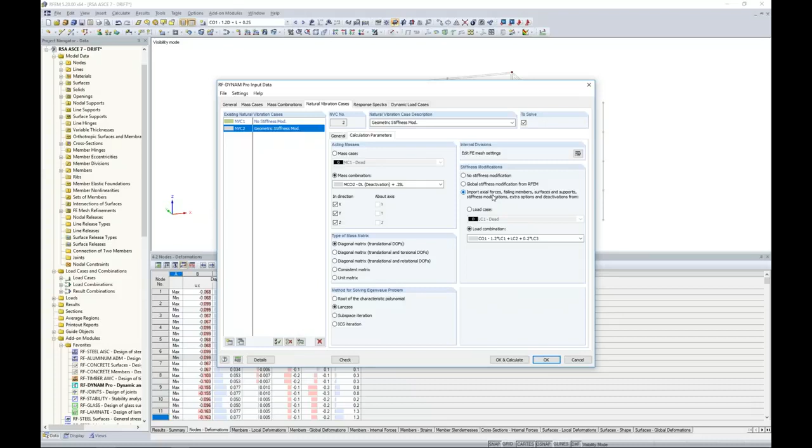The only thing I'm going to do is import in the axial forces from that load combination I just created, load combination 1, bringing in all those axial forces from my gravity loads.

Under my dynamic load case, we have our first dynamic load case here, which did not consider P delta, so we'll type in a description of 'no P delta.' I'll make a copy of this one and just take away the 'no' so that we know this one is including P delta.

The difference here is I need to choose my natural vibration case where I have now included this geometric stiffness modification. Everything else remains the same here. We're still relating the response spectrum analysis per the ASCE 7 to the X and Y directions, accidental eccentricity, and so on. But now I'm going to click OK and calculate.

I already have a saved model here, just for the sake of time. We'll jump to this model where I've exported out all of my natural vibration cases as well as my dynamic load cases where I have and have not considered P delta. So now if I take a look at all of my load cases, we have double the amount. Initially, all of my load cases, from my dynamic load case not considering P delta, are shown here.

The calculation parameters are set to a geometrically linear analysis. So with a P delta analysis, this is a two-step process. We first took care of it to modify the geometric stiffness matrix when we exported those equivalent loads back out to RFEM, but we also need to actually run a second order analysis within RFEM.

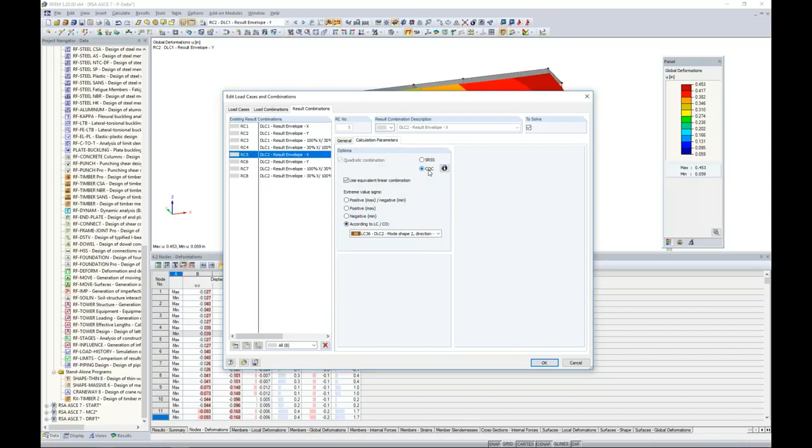So we run the calculation, and remember, we still have the scenario where we need to combine all of those different load cases with the CQC rule. That's why we have 4 sets of result combinations not considering P delta, and 4 considering P delta. So nothing further to do here - the program simply combines all of those individual load cases with CQC.

So once we run our analysis, we can compare the results from the X direction excitation. Maybe we take a look at internal forces and deflections for all of our elements under the results tab, and compare it to the exact same excitation direction but without P delta considered, to see how that varies.

Now, for my example today, there really was no difference at all, and that's likely because my theta equation from the ASCE 7 is really, really small, so P delta did not make too much of an influence. But there are scenarios where P delta does need to be considered, so this is the effective way to do it within the actual calculation itself.

Now, the last thing to do here is under my result combinations - we've created all of these seismic forces, but I have yet to combine them with my gravity loads. So we can do one last thing here to create an additional result combination manually.

I'm going to take my load combination 1 that I'm running with a second order analysis - that's all my gravity loads - and add in my 100/30 rule that's considering P delta. But I want to take both of my 100/30 rules because I don't know which one provides a worst case scenario, so we can use this option here with the OR operator.

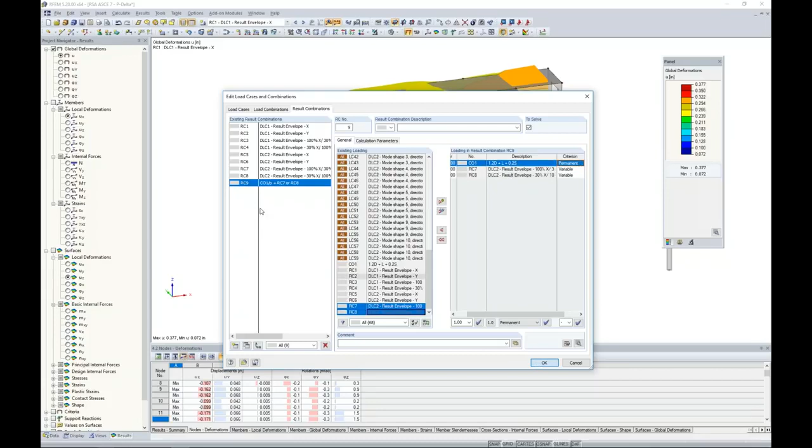So I can click OK, and actually the program doesn't even need to run a calculation with this result combination, because it just uses superposition to add up those load combinations along with the result combination. So immediately we're presented here with our deflections and our internal forces.

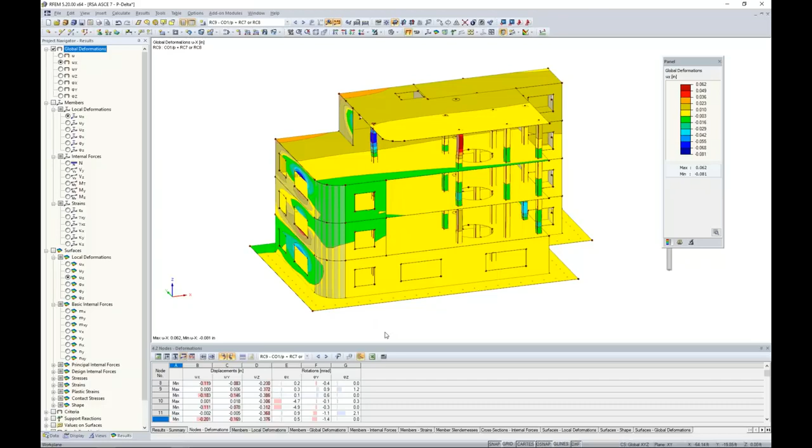So this is the result combination that we could take into additional add-on modules and design all of our reinforced concrete slabs or columns, for example, per the ACI or the CSA standard. That's how we combine everything into a single result combination.